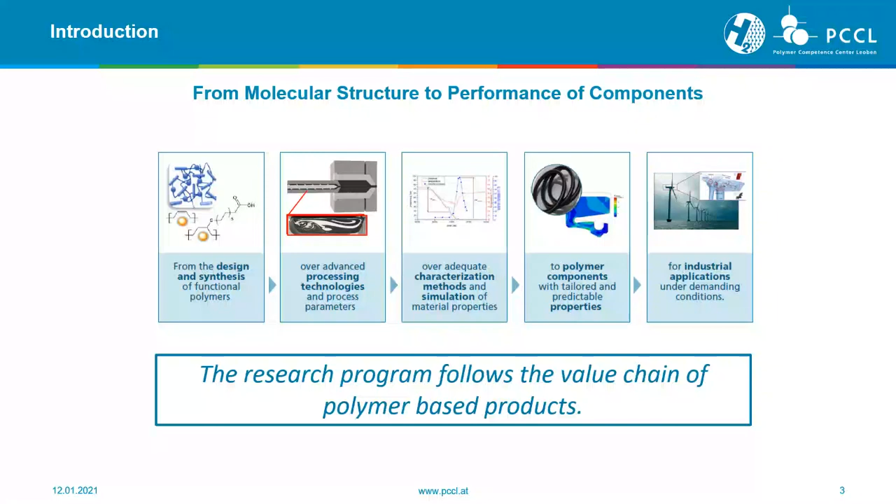More or less, what we offer you is long-term R&D projects with industry partners and also with additional scientific partners. We give you the possibility to access easily public funding schemes, for example, the COMET program in Austria. But we're also working on a contractual basis, giving you the possibility of material characterization analysis or simulation, what we have in-house in terms of service.

To give you an overview, as Gernot mentioned, we have different divisions at the PCCL focusing on different topics. First, as I've shown you for the value chain, we'll start with chemistry of functional polymers. Then we have smart materials, surface testing, polymers, composites for structural applications, simulation and modeling, and the division I'm heading, elastomer technologies and process optimization.

Today, I'd like to give you a little bit more detail about this division. So overall, we are 3 research groups in the division.

We have polymer tribology, headed by Dr. Hausberger. We have processing technologies, headed by Dr. Kerschbaumer. And I'm also heading, additionally to the division, the research group material science and testing. Here on the side, you see a short overview.

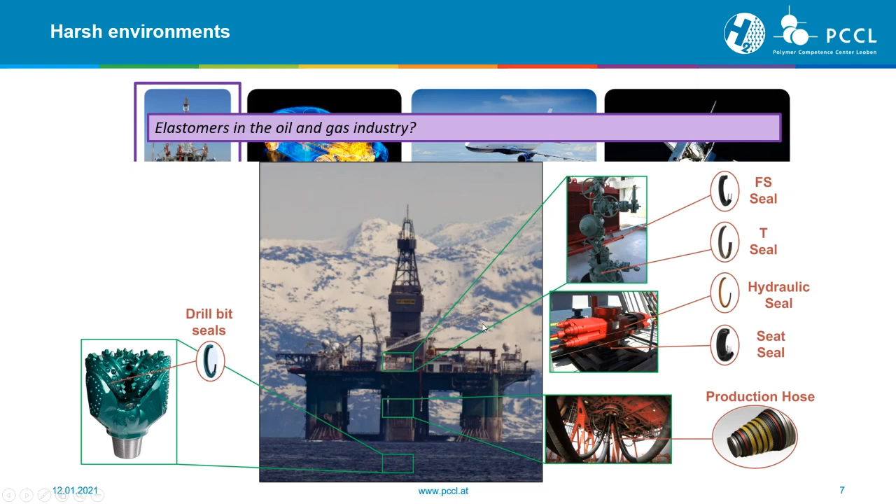More or less, here we have these different applications, and what brings them together is that we have a variety of influencing factors on the material. When thinking of applications at very low temperature, for example Arctic climate, we have temperatures down to -40. When thinking of very high temperatures, drilling depths up to 10 kilometers, or high temperature reservoirs, we have temperatures up to 200 degrees, and pressures up to 1000 bar in combination with very aggressive media.

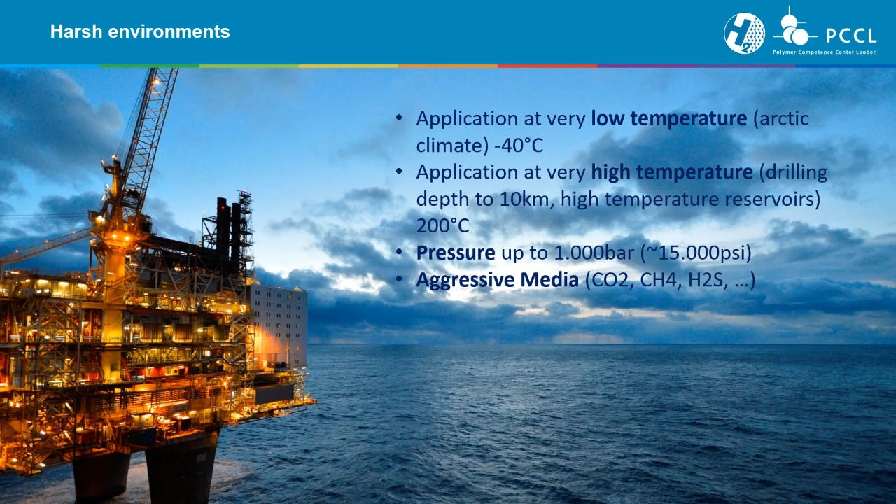All of this leads to an impact on material performance, on long-term performance. So for our material and application we will receive aging, and we will receive swelling when we apply oil and gases. What we are doing here at the PCCL, together with our company partners in different research projects, is trying to get insight into what's happening with the material in the application.

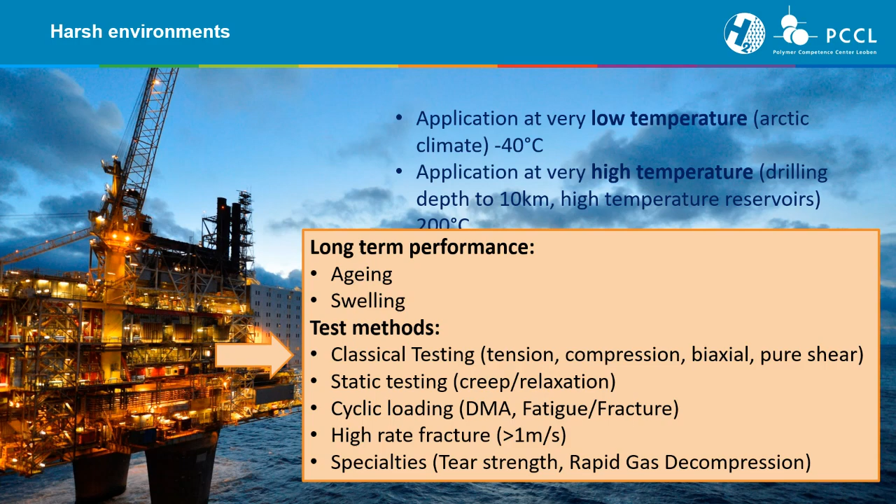Therefore we are utilizing different classical testing devices and classical testing characterization techniques. We're doing creep relaxation, dynamic mechanical analysis, fatigue fracture, applying high-rate fracture tests, and also ending up with some specialties like the rapid gas decompression behavior, which I'd like to tell you a little bit about at the end of the presentation. But let's start with the classical material characterization.

The classical material characterization, as we all know, in the field of polymer material characterization includes tension, compression tests, creep, relaxation, and dynamic mechanical characterization. We can characterize multi-axial loading. We can characterize multi-axial contacts with different tribological systems, and the interaction between adhesion, deformation, and different materials and multi-layer buildups.

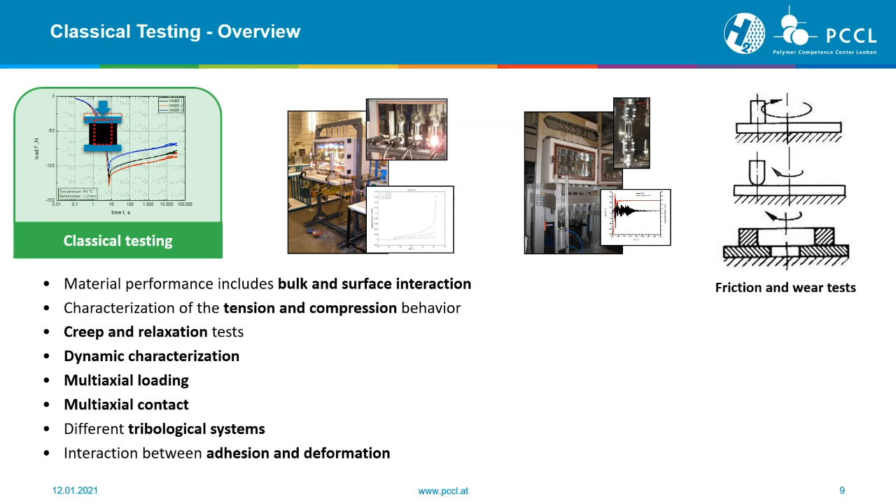When we think of elastomers in this field of application, a very simple example is compression tension. Here you see the compression and tension curve of an HNBR, showing strong nonlinear behavior and the difference between the compression and tension behavior of the material. We've also applied these tests at different temperatures, 70 to 110, both for compression and tension, and the impact of this test temperature on the results is not really that big.

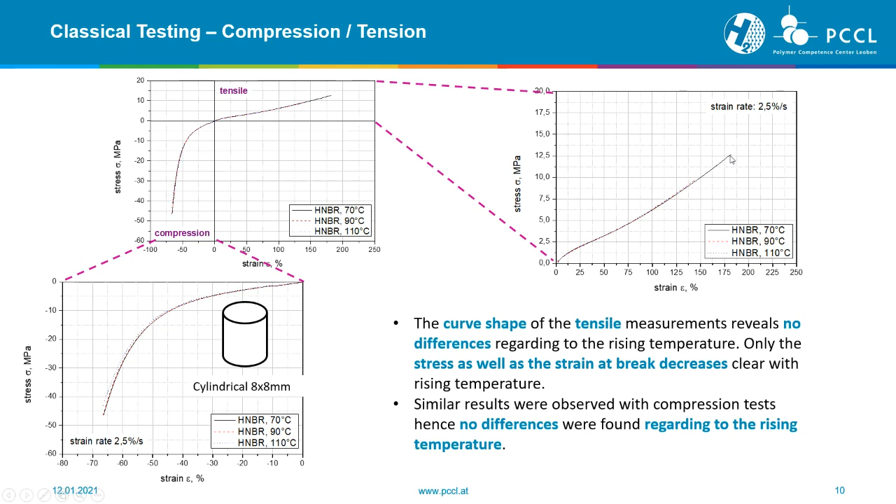The only difference we can see is that we have a little bit of a decrease in the stress and strain at break when we increase the temperature.

Additionally, when thinking of tensile testing of rubbers, we always have some fillers inside the material. With this study, we wanted to analyze a little more the impact of processing imperfections and also the impact of different filler sizes. So we introduced to the material different sizes of glass beads - small glass beads, large glass beads - and used them in both an untreated and treated way.

Based on specimen geometry, an S2 specimen per DIN 53504, we've seen that from the pure HNBR to the large beads we get nearly the same material behavior. But when you introduce the small beads, we found a clear decrease of the stress and strain at break. We used a material filled with 0.5 weight percent, meaning we had many more small beads compared to larger beads, which also explains this behavior. Finally, comparing untreated and treated material, we found that the untreated small glass beads resulted in lower stress and strain at break.

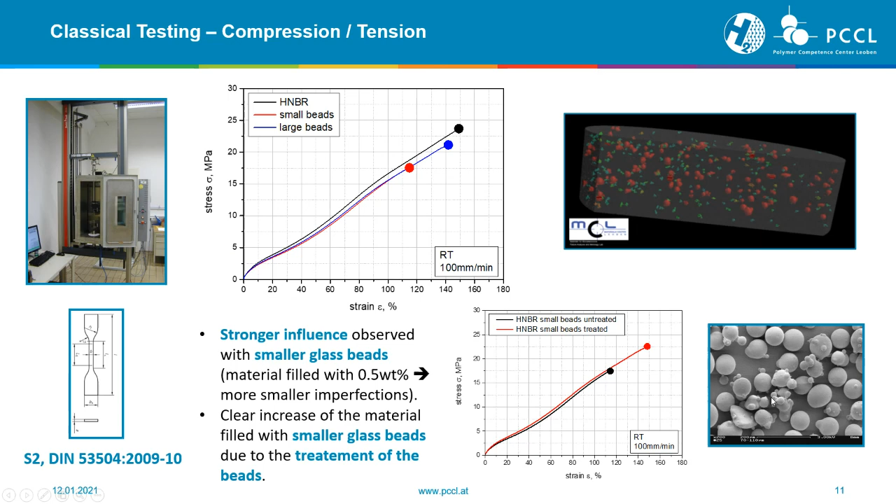When we now think of classical tensile testing, more and more smart materials are coming up for different applications. This is already applied for composite materials to achieve load coupling, for example for wind turbine blades, or to have aeroelastic tailored applications. We've also tried to implement this for soft materials, replacing the resin with silicone, and tried to introduce a load coupling mechanism directly in soft materials to combine both - for example, distinctive tension-twist coupling.

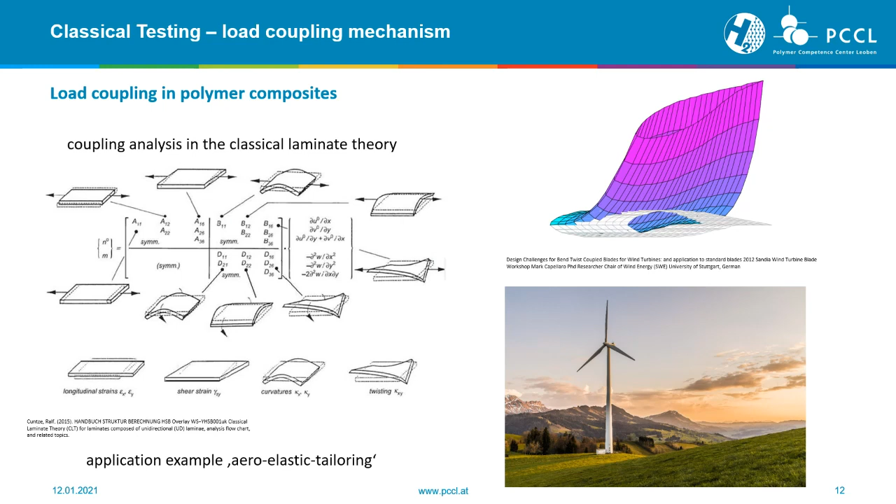And therefore, we developed also different test setups. Here's an example: we developed the test chain starting from single fiber tests, where we used single fibers for characterization, working together with some scientific partners. Then we developed here in Leoben a test setup for fiber bundle testing. And finally, we implemented a test setup where we directly ended up with the possibility to test a woven fabric.

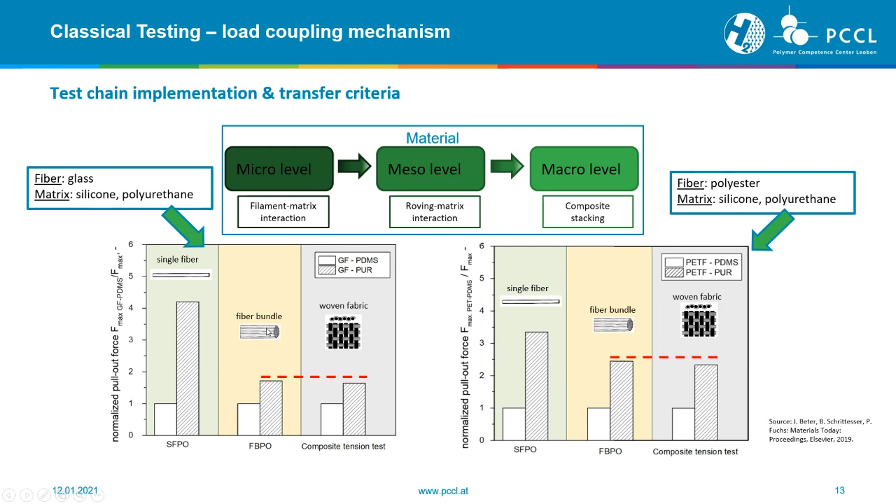For different materials, the left side for silicone polyurethane with glass fiber, and on the right side for the matrix material, silicone polyurethane with polyester fiber, we see the normalized pull-out force. We received for the fiber bundle test, the woven fabric test, and the single fiber test at least the same tendency, the same trend, which means we can characterize much more easily with the fiber bundle, and it's a little bit more application oriented compared to the single fiber test.

However, focusing on the woven fabric, we implemented tests first with setups where we only have one and two layered systems, characterizing different fiber orientations. For example, here you see the fiber orientation 0-90 degrees, where we received a very stiff material performance compared to ±45 degrees, where we have a much higher strain or a much larger strain compared to the lower stress when we compare it to the 0-90 degrees.

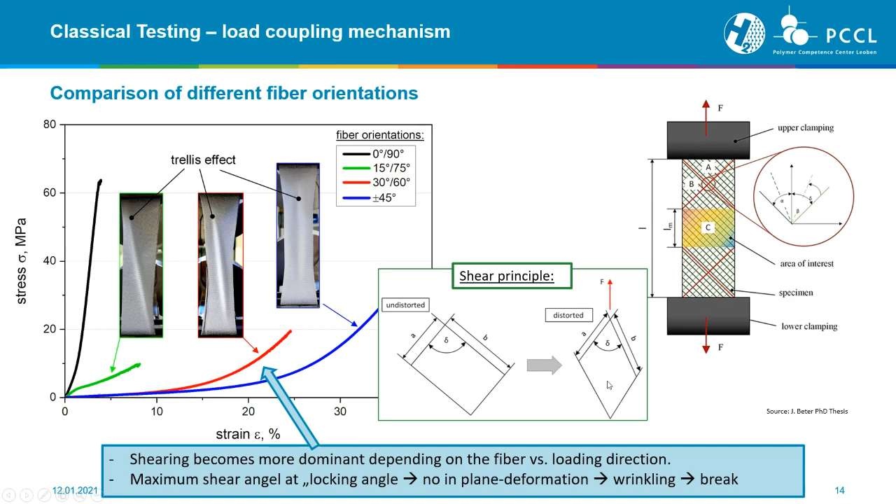And what we found here was also so-called wrinkling of the material. You see it here also with this trellis effect. This is based on the shear principle, because when you reach this maximum shear angle, then no in-plane deformation is possible anymore. And therefore you end up with this wrinkling, and finally with the break of the setup or of the material.

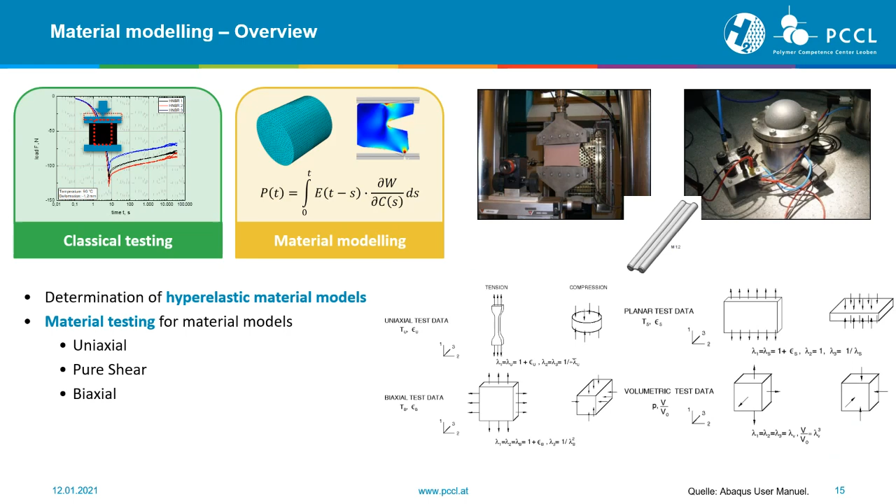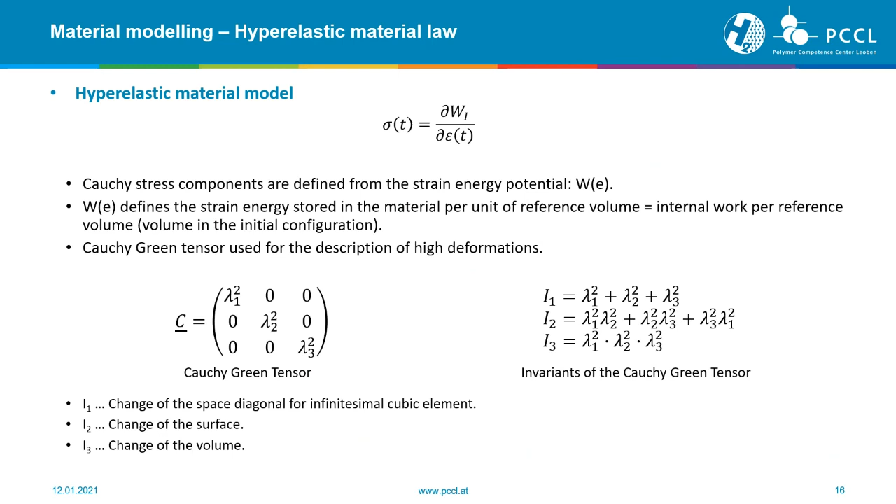When we think of elastomers, then we think of hyperelastic material models, also very simple at the beginning. Here we have to define strain energy density. This is a specialty of elastomers and soft materials: the hyperelastic material performance is based on an energy, compared to classical polymers.

This means when we think of different hyperelastic material laws already implemented in some simulation tools, for example Abaqus, you can choose from a Neo-Hookean model, to a Mooney-Rivlin model, to an Ogden model, only to give you an example. However, these are all just basic models which explain a hyperelastic material law. Nevertheless, you always have to think of where are the limits of your application and what you'd like to do with your simulation.

These are two very important points, because, for example, the Neo-Hookean model fits well for uniaxial tension experiments up to a maximum deformation of 40%. This means when we have an application where our material is applied up to 500% deformation, the Neo-Hookean model will not fit very well. Therefore, there are also other models like the Ogden model or the Mooney-Rivlin model. However, as I mentioned, these are really the basic material models.

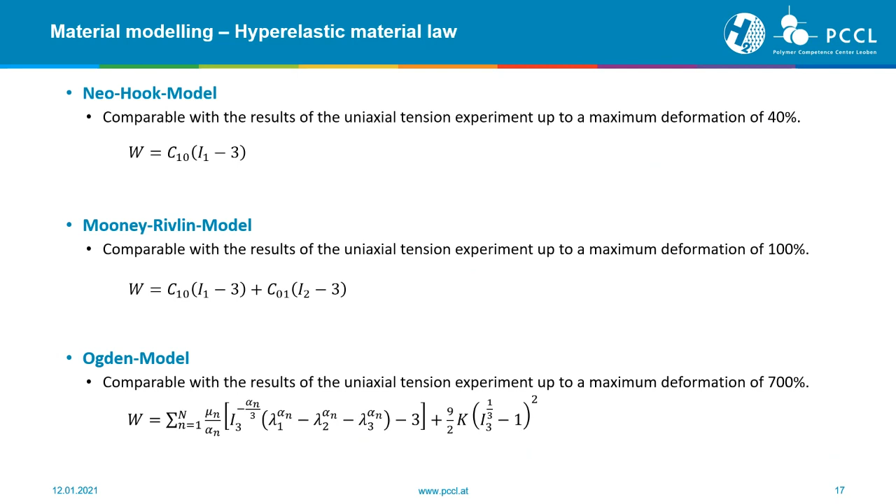And what we're also doing here is developing new material models, especially for composite materials. One aim we are focusing on is, for example, to develop homogenized material models to describe the hyperelastic material behavior. Only to give you an example or a very quick overview, here we have the MFI model.

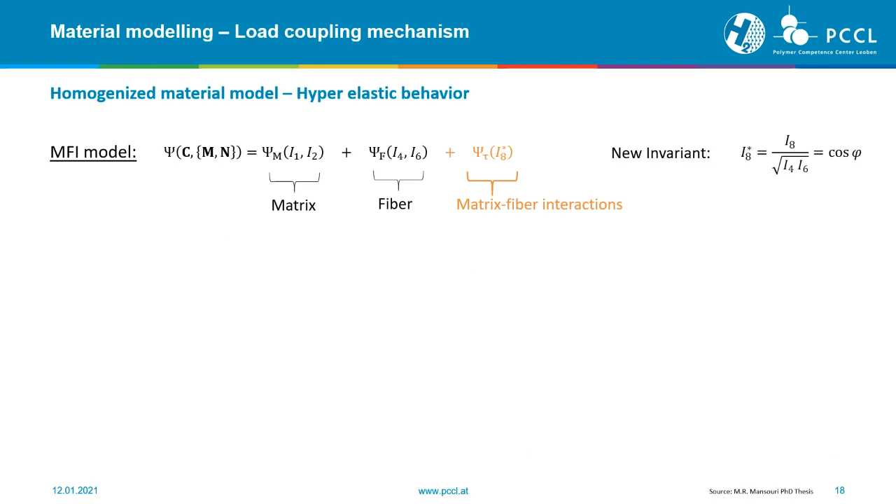This MFI model describes the matrix behavior, describes the fiber behavior, and additionally, when we think of our material showing this wrinkling effect, we also have to explain these matrix-fiber interactions. Here our simulation group has introduced a new matrix-fiber interaction and also a new invariant, explaining this material behavior as you see it here.

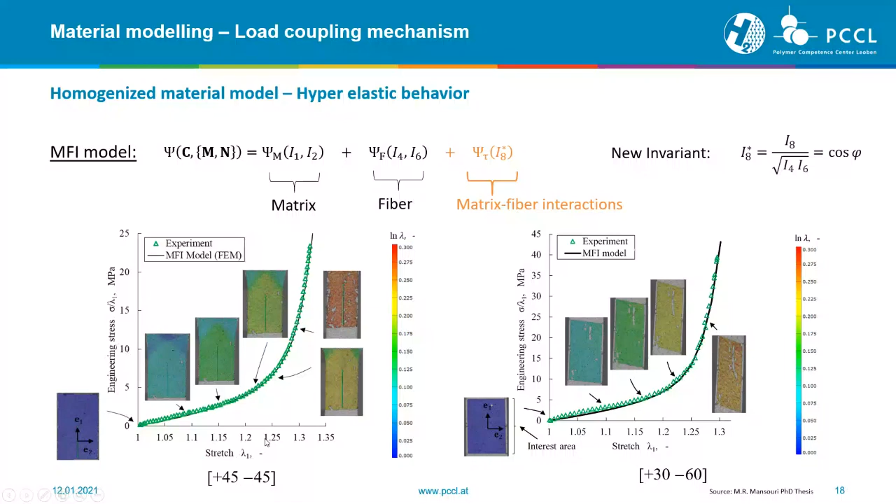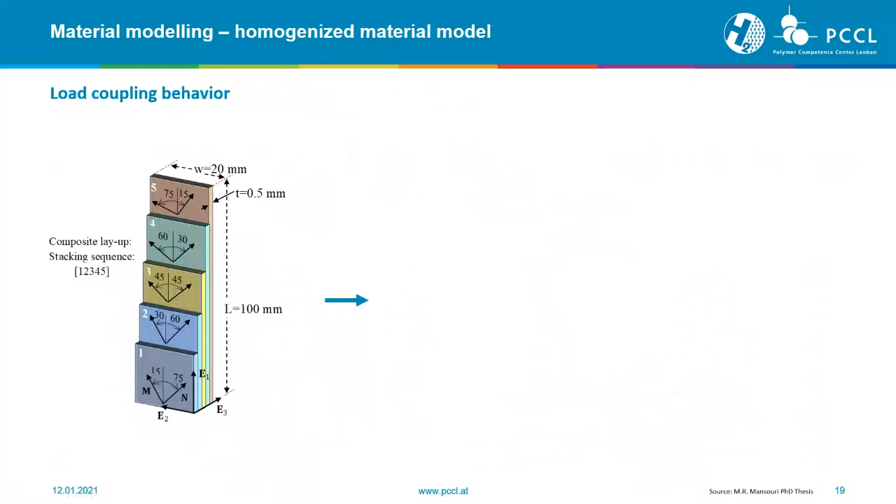From these simple tests or simple material models, we always want to move toward an application. Therefore, we also want to describe the load coupling behavior with a composite layup. Here, we've introduced some simulation tools, adapting this model with the aim to introduce a defined end twist or defined end moment when we apply a defined force to the material.

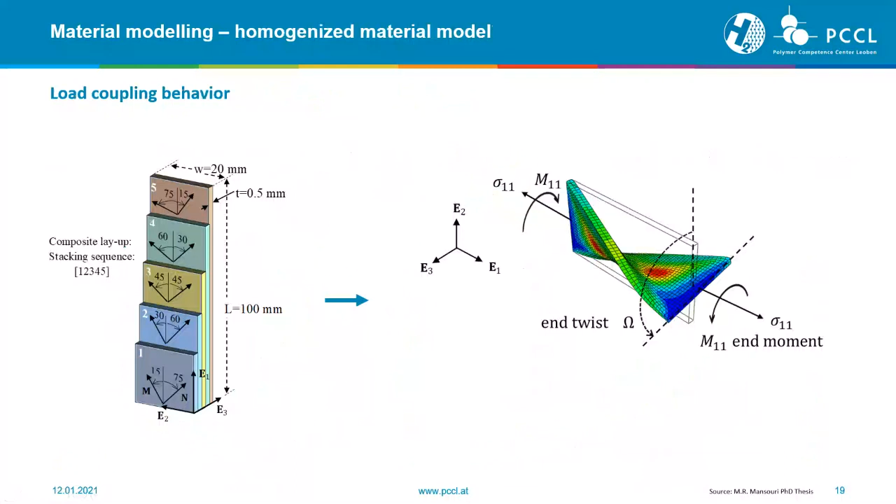This results in a lot of data points when we think of moment as a function of end twist, where we can see where we can achieve the highest or biggest load coupling potential, based on our material model and the theoretical observations we've made so far.

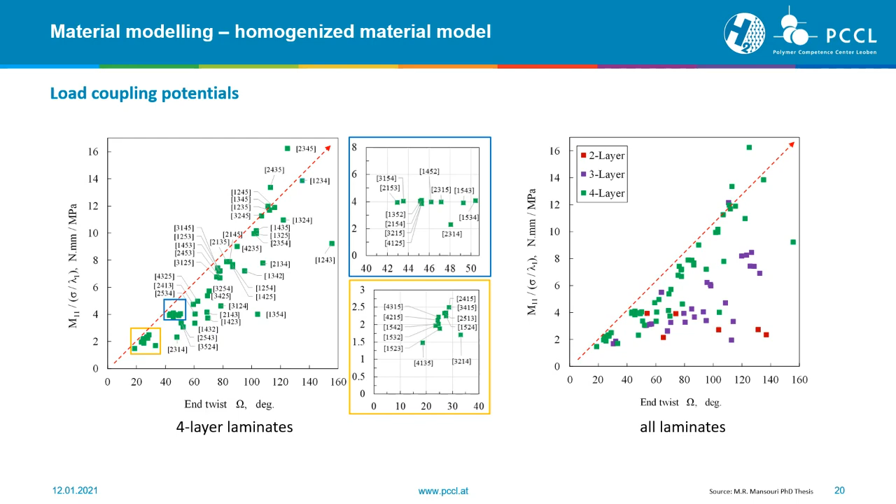We are still on a theoretical path, and to bring this to reality, we also have to measure this end twist and the moment we can receive with our different layers. Therefore, we've designed a concept to measure these load coupling forces and moments by introducing a new load coupling test setup, directly recording the twist angle, the torsion force, and the tension force.

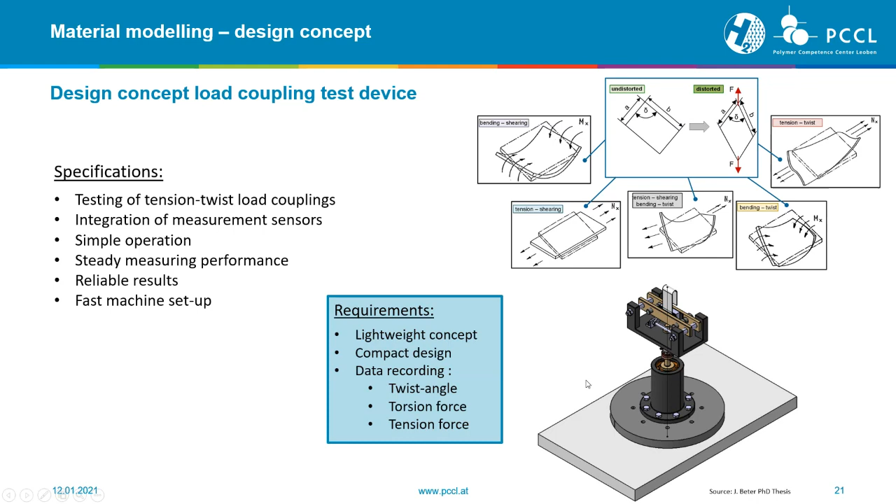Here we are with the first results of this test setup. On the left side, you see stress-strain properties. On the right side, you see the twist angle. What you can see very clearly is that we've monitored the stress depending on strain for plus-minus 45, 30-60, and 30-60 plus-minus 45.

All of these are two-layer buildups: 2 layers of plus-minus 45, 2 layers of 30-60, and here 1 layer of 30-60 with 1 layer of plus-minus 45. You see here clearly the different material behavior.

Additionally, we've implemented a study with different clamping distances or gauge lengths. You also see here that for the twist angle with plus-minus 45, we received nearly nothing, whereas for 30-60, we received a twist angle of up to 25 degrees.

The colored pictures you also see here are not simulation results—they are directly measured. It's the measurement of surface strain with a camera system. We are currently in the phase of directly correlating these simulation results with our test results to verify this test setup.

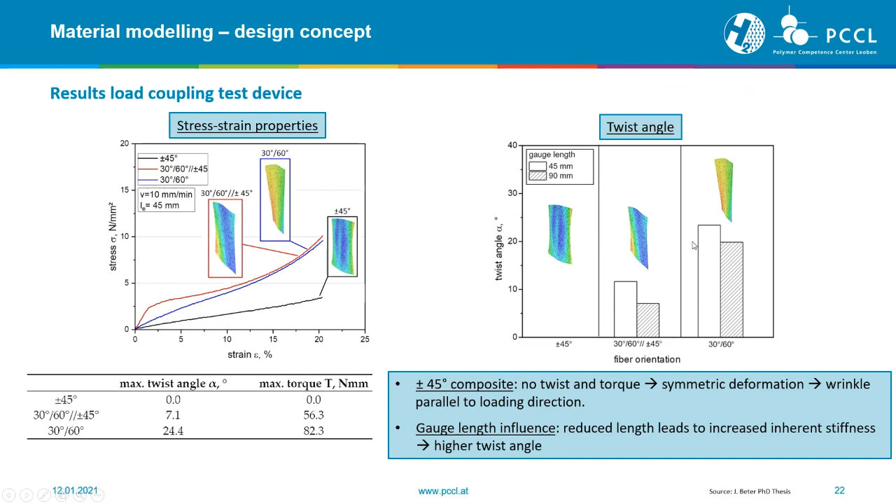Now, leaving the material models, we're moving in the direction of aging of the material. When we think back to different applications—oil and gas, space, some industry applications—we always have some media, some temperature, some harsh environments, which directly reduce or impact the lifetime of our materials.

Here we are talking about thermo-oxidative aging when applied to higher temperatures. When we have oil or swelling agents, the material will swell. And when we have both media and temperature, we have a combination of both effects, leading to a higher impact of thermo-oxidative aging or swelling.

As an example, you see here an impact on the loss factor. Based on the dynamic characterization, we've defined storage modulus, loss modulus, dynamic modulus, and loss factor. The loss factor, tangent delta, also represents the damping of the material behavior. We've studied the material performance here.

In this case, once again for HNBR: black line is virgin, and then you see red, blue, and green lines for aged material—at 100 degrees for 24 hours, 72 hours, and 168 hours. Then we've increased the temperature from 100 to 150 to 170.

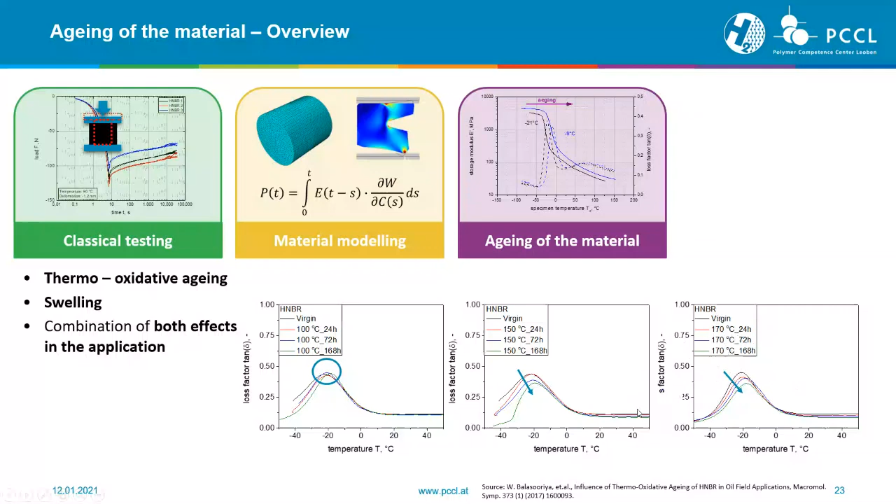But we see this not only in our dynamic mechanical characterization, which represents the network or damping capabilities of the material—we also see it, for example, in stress-strain curves.

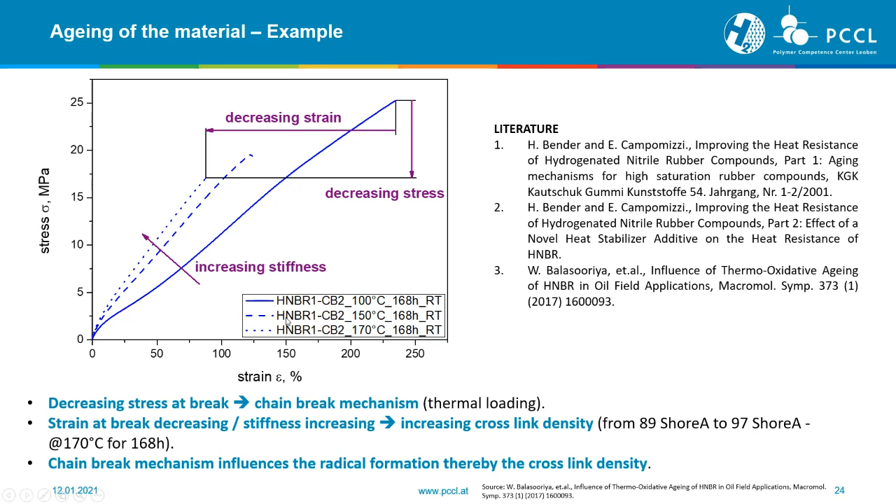I'm showing you just 3 examples here, with maximum aging time always the same at 168 hours, applied at 100, 150, and 170 degrees C. What we've seen is the virgin curve ending with a strong increase in stiffness, a clear decreasing strain, and a strong decreasing stress—this just with 168 hours for an HNBR, which is usually applied for high temperature applications.

Leaving the aging of the material, we will come to material fracture and fatigue. When we're focusing on material fracture and fatigue testing, we can think of a lot of different applications where these play an important role.

When we have different frequencies, for example, think of hoses in different machines when we start them, we have frequencies up to kilohertz going through the material, which sometimes leads to failure of the component. We also have a strong influence of different temperature.

When we stay with machines and hoses, we also have most times some heated oil inside these hoses or some hydraulic fluid, which leads to an impact of temperature, and for sure an impact of the loading amplitude.

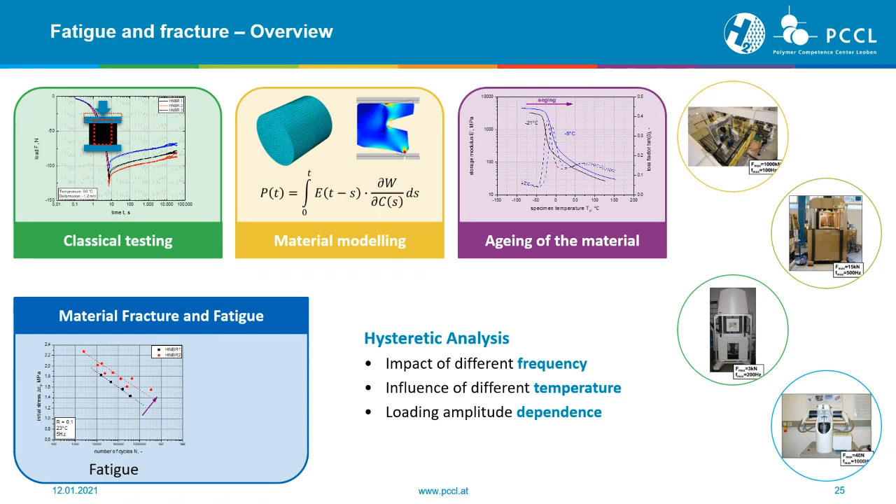I'd like to give you a short overview and explain a little bit more about fatigue. What is fatigue? Basically, fatigue describes the weakening of the material caused by repeatedly applied loads, so-called cyclic loading. This means applying a cyclic load to our material.

Here we can distinguish between two approaches. We have the crack nucleation approach, which is more or less based on dumbbell specimens, and a Wöhler approach. This means I define a stress amplitude, apply it to my sample specimen, and end up with a number of cycles to failure.

The second approach is the crack growth approach, more or less the fracture mechanics approach, based on tearing energy, explained by a Paris-Erdogan approach or Paris-Erdogan plot, using, for example, pure shear specimens.

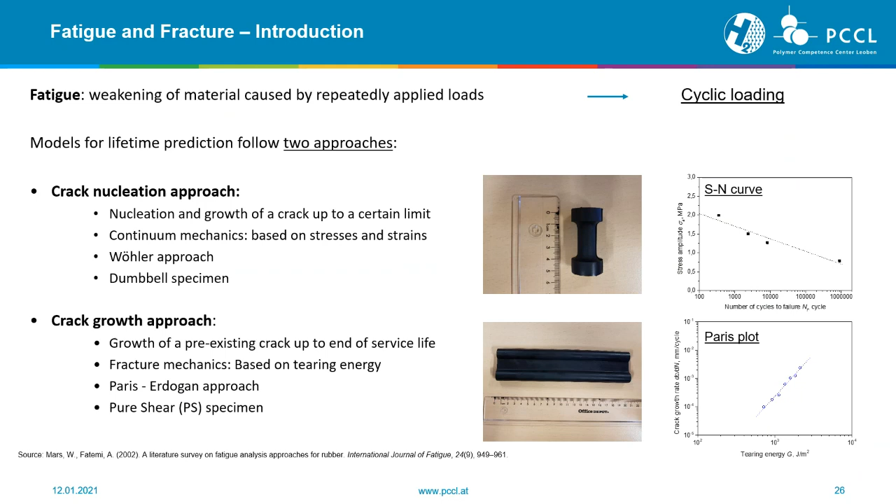For today, I'd like to focus a little bit more on the crack growth approach, and give you an insight into what we've done here so far and what we have developed.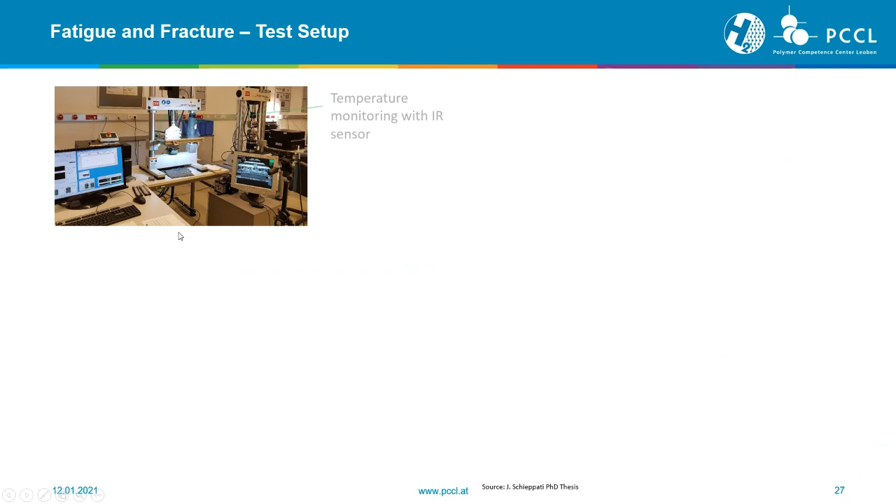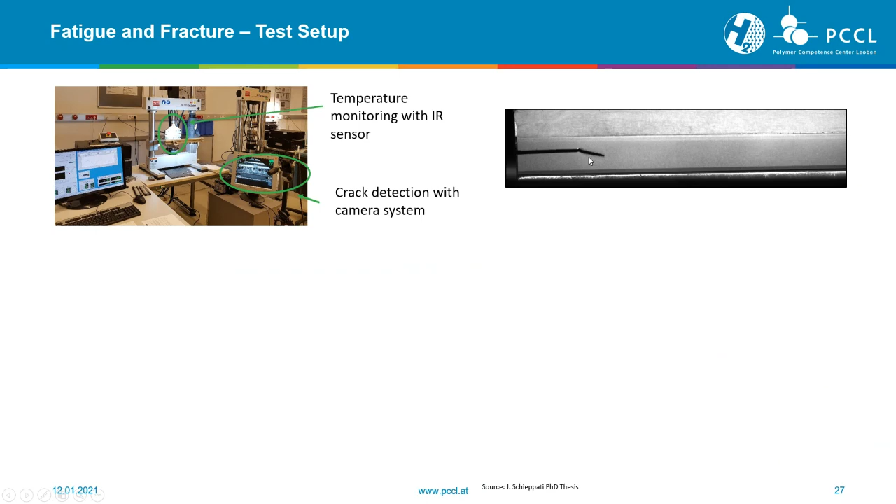You see here our test setup in the lab, where we have our specimen with IR sensor, a crack detection system, so a camera, to monitor our crack growth over the number of cycles to failure, or the number of cycles to load.

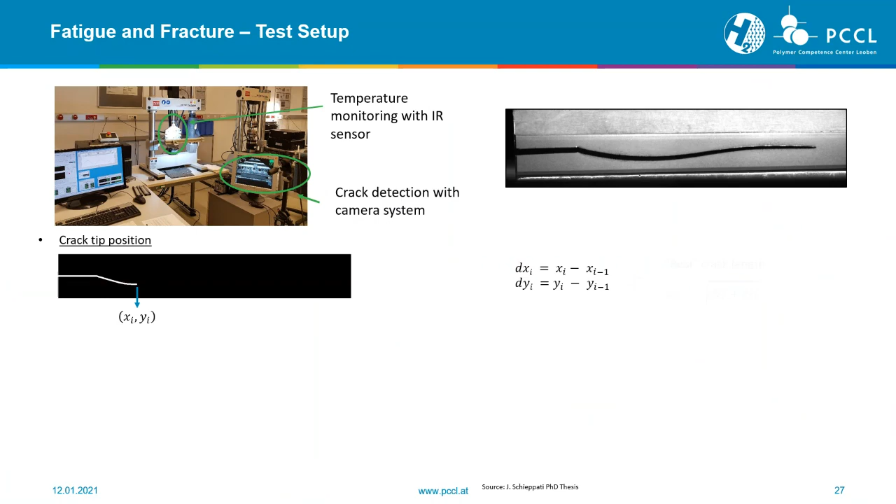We developed a method where we can measure directly with this camera the crack tip position, X and Y, and then end up with the contour length to finally calculate fracture mechanic parameters.

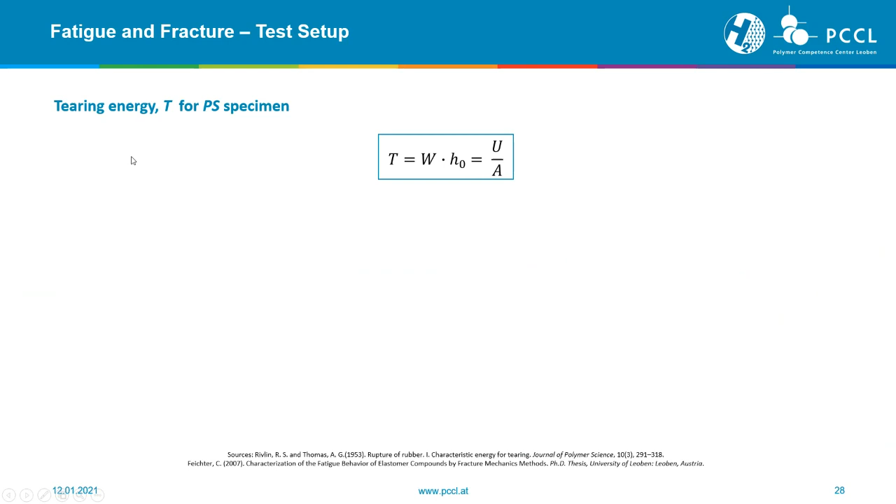These fracture mechanic parameters, in this case, we've chosen the tearing energy for pure shear specimens. The important thing for us is, on one hand, the hysteresis, which means the area under the load-displacement curve, and on the other hand, the uncracked specimen area.

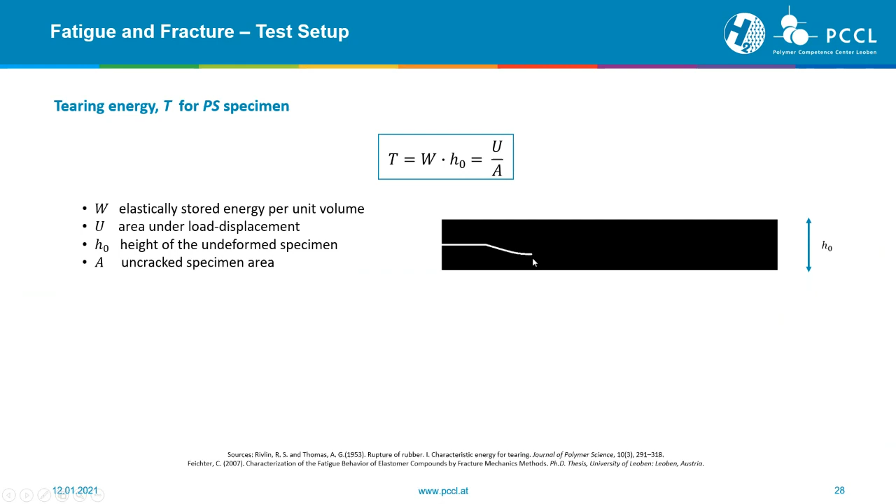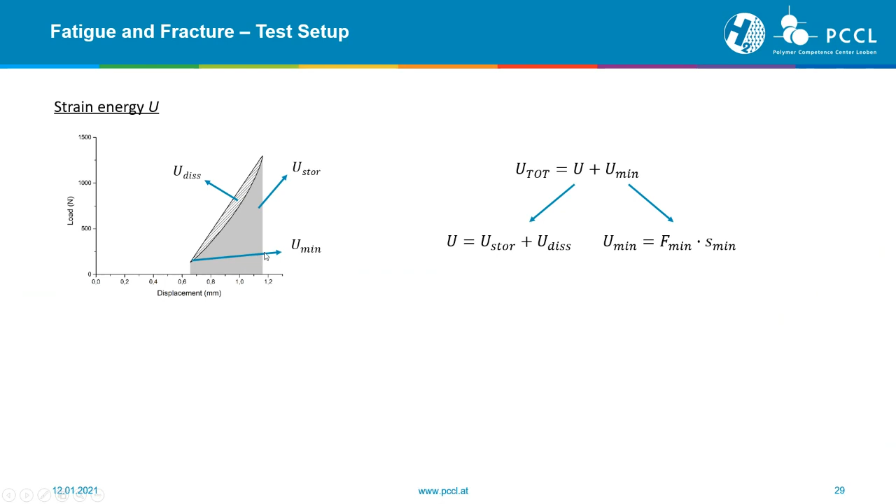Therefore, we need the position of the crack, with some boundaries, ending up with the definition of the strain energy, as I mentioned. So we have the total energy, with dissipated stored energy. We defined in our case a minimum energy, and then end up with this uncracked specimen area, as I mentioned before.

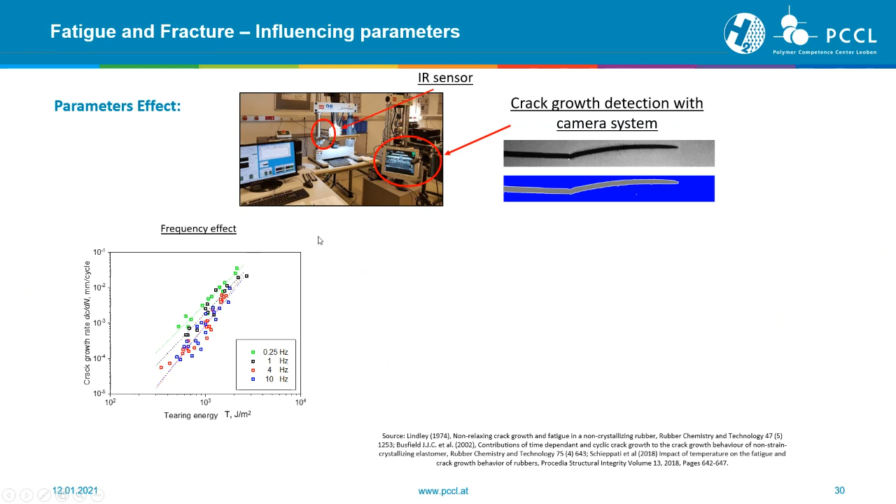This brings us to the results, and here we also have a lot of different influencing factors, as I mentioned before. The first case, the parameter effect, we've measured with this camera system for different frequencies. We implemented these tests for 0.25, 1, 4, and 10 Hertz.

As you can see in our results, for higher frequencies we received a lower crack growth rate. At first thought this seems a little bit weird or strange, but we searched the literature and thought a little more into detail about this.

At the end, it makes sense, because the total crack growth rate consists of a static part and a dynamic part. When we increase the frequency, the static part decreases and the dynamic part increases, and due to this decrease of the static part, the total crack growth rate is a little bit lower compared to the lower frequencies.

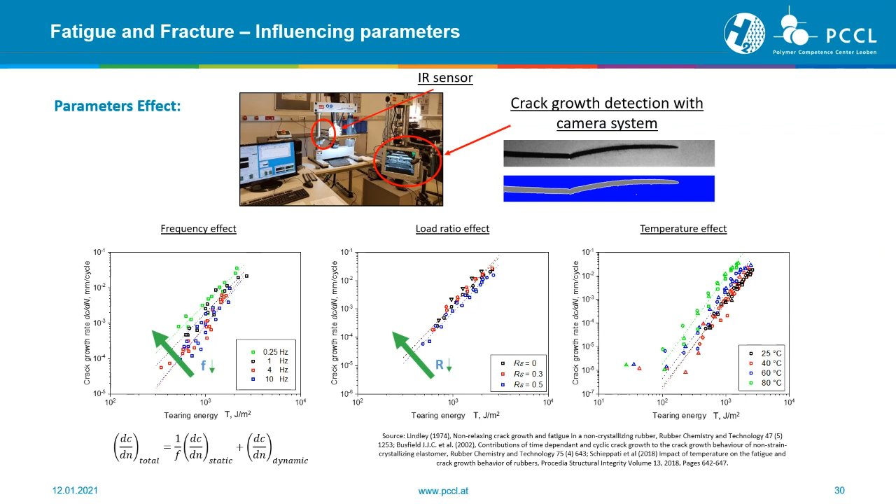Staying with temperature, we looked a bit more into detail because when we talk about application time in terms of fatigue and hysteretic performance, temperature always plays an important role. Therefore, we applied an IR camera, and what you can see here is the surface temperature as a function of the number of cycles for the different frequencies I showed before: 0.25, 1, 4, and 10 Hertz. You see for the lowest frequency roughly 22 to 24, but here we go from roughly 24 up to nearly 30 at 10 Hertz.

This is only for a pure shear specimen, which has a thickness much lower compared to the dumbbell specimen. The dumbbell specimen has a diameter of roughly 12 millimeters, while here we have a thickness of 4 or 6 millimeters, which makes a big difference.

Additionally, not only the specimen geometry has a big impact, but also the material performance. For material A, for example, we have a nearly linear behavior when talking about elastomers, whereas material B shows strong non-linear behavior with high deformations, ending up at much higher temperatures.

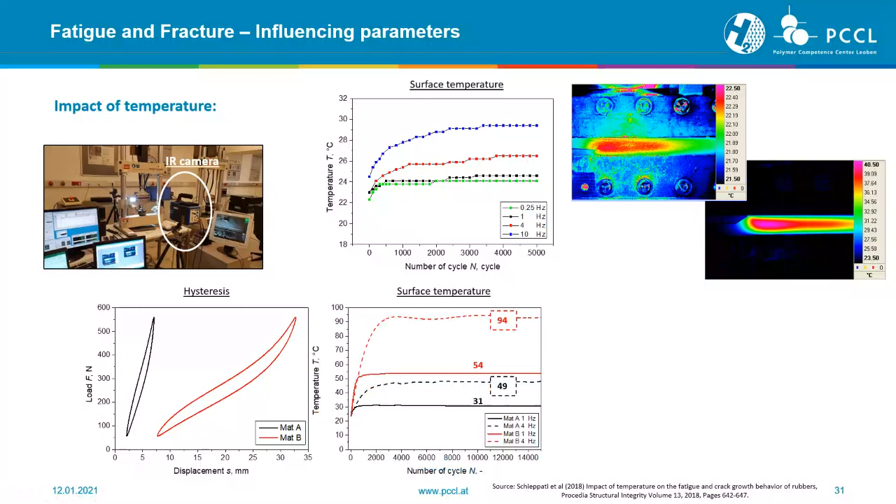Additionally, we measured the internal temperature of such dumbbell specimens by directly molding a thermocouple inside the material, doing this several times to get an average of what's happening. As expected, the core temperature is even higher compared to the surface temperature we measured outside the material.

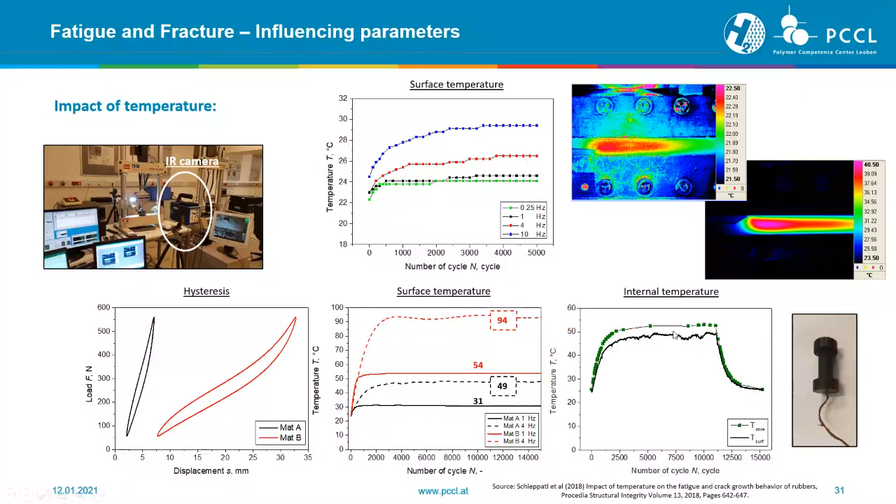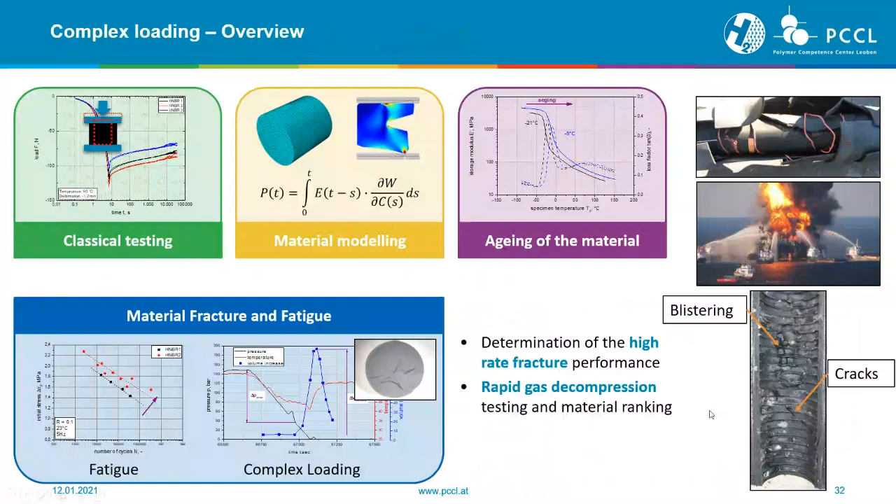This brings us to the next point: complex loading behaviors, where we're back to oil and gas industry with very complex loadings and harsh environments, as shown in the introduction. For example, this hose failed at 1,300 bars, and nobody wants a burning oil rig onshore or offshore. Here we cut a hose open where you can directly see blistering and cracks inside the material.

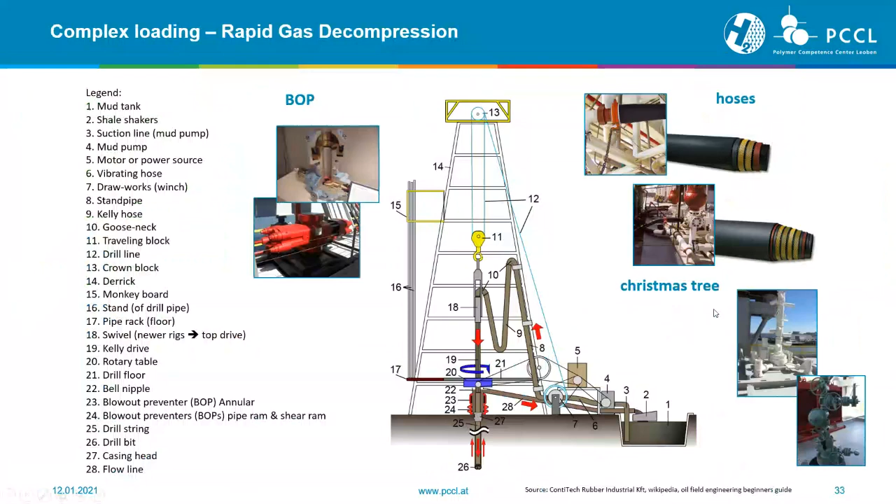To describe this very complex loading, we'd like to give an overview of these applications again: safety applications like blowout preventers, different hoses, Christmas trees. What we've focused on so far is rapid gas decompression behavior, a very special behavior especially for materials applied to high pressure gases. This is very important for oil and gas industry nowadays, but there's also a second important application we'll focus on in the last slides.

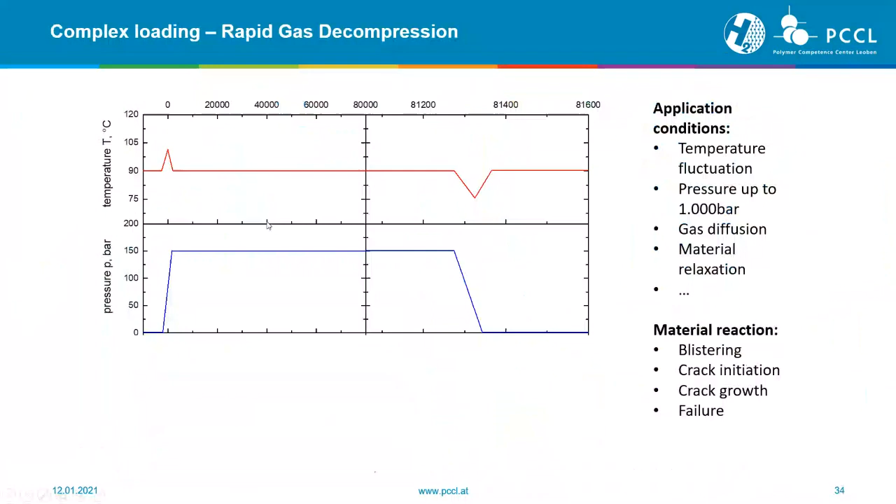At the beginning we have a compression phase, applying temperature and pressure, in this case up to 150 bars. This causes swelling of the material due to gas penetration. Then we disturb this equilibrium state and the decompression phase starts, with temperature fluctuations at the beginning and end. During decompression, the stored gas inside the material leads to an even higher volume change, and finally to cracking of the material—blistering, crack initiation, crack growth, and then final failure.

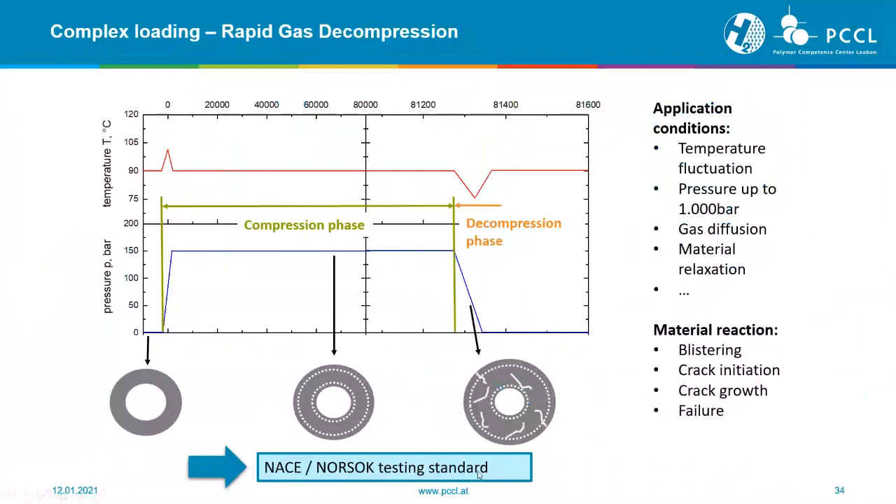One or two testing standards are NACE and NORSOK. They specify temperatures, pressures, specimen geometries, and gases for the gas industry, in this case CO2 and CH4. You store your O-rings directly in the autoclave, test according to the standard, and then rate the cross-section after testing by cutting the O-rings into 4 pieces. Using a microscope or camera, you photograph the cross-section and count how many cracks there are and how long they are. The rating goes from 0 to 5, where 0 means no cracks (very good) and 5 means complete separation of the seal into fragments (completely failed).

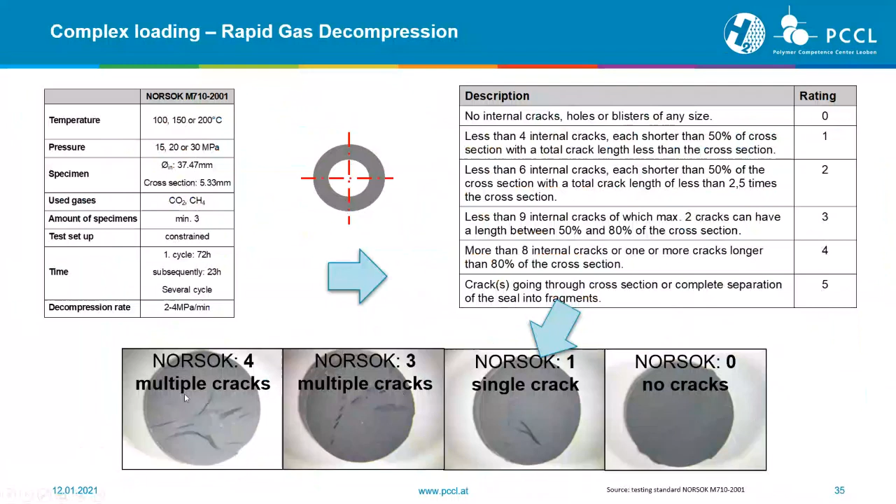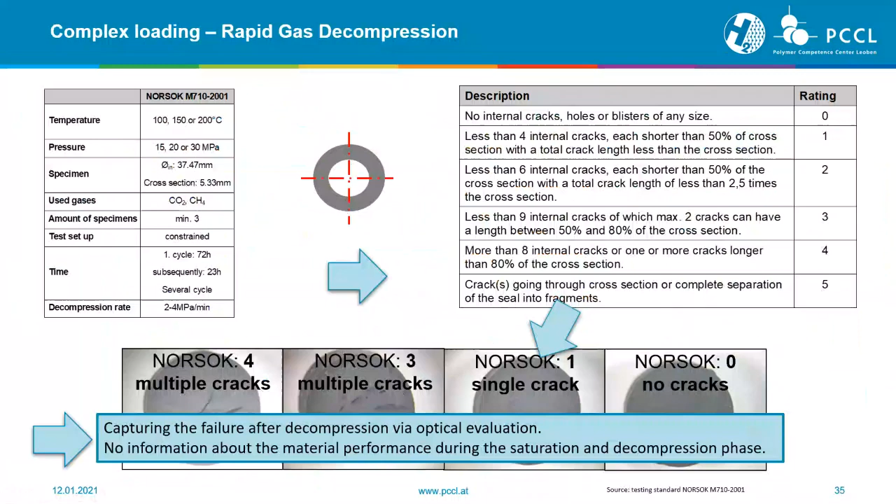What we have done so far is that based on the testing standard, we can just observe the material behavior after the test in terms of fracture. We'd like to go a little bit more into detail. Therefore, we developed together with a company partner a test setup, an autoclave test system with a camera system, where we can directly measure the volume change during the compression phase as well as during the decompression phase.

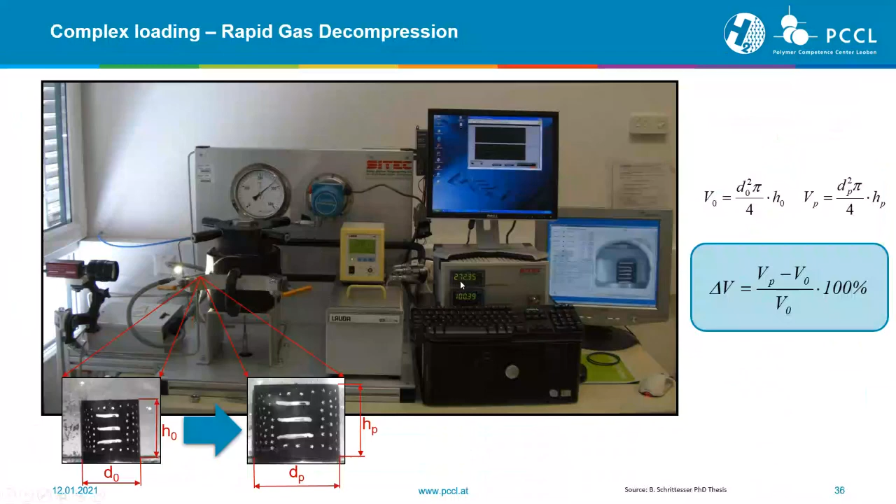You can see the autoclave temperature unit, the pressure, in this case 272 bars. What we've measured are the compression phase, the decompression phase, and additionally to the pressure and temperature, what we directly monitor over our equipment. We can use also the volume increase during compression phase, the volume increase during decompression phase, and then we can also define some additional parameters, for example an initial time, which is needed until the volume increase starts.

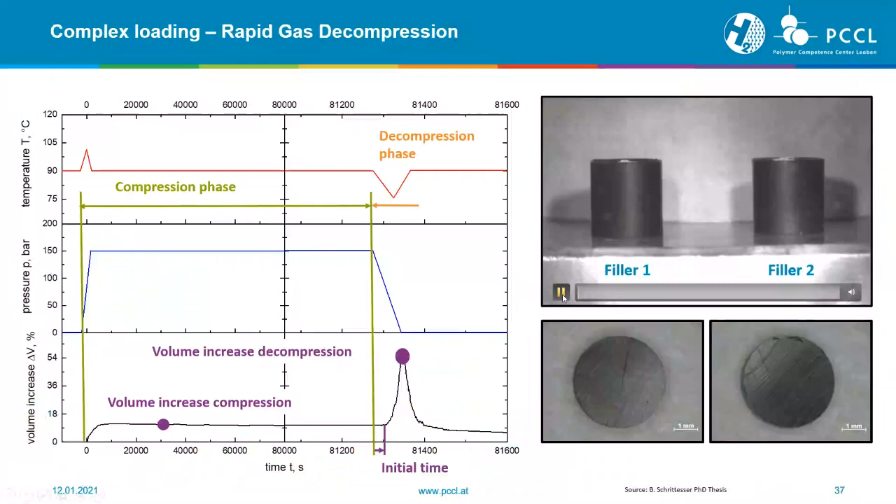Here I've brought with me a sample of 2 different fillers. Basically, more or less, the material is the same, just used filler 1 and filler 2. What we can see here now, the decompression phase starts, clear volume increase for both, but for one sample, the material cannot withstand this crack initiation process, leading to a rapid crack growth inside the material, and therefore you have like a rocket effect where the gas which is stored inside the material is spontaneously released by a crack. The second material performed very well, with a ranking of 0.

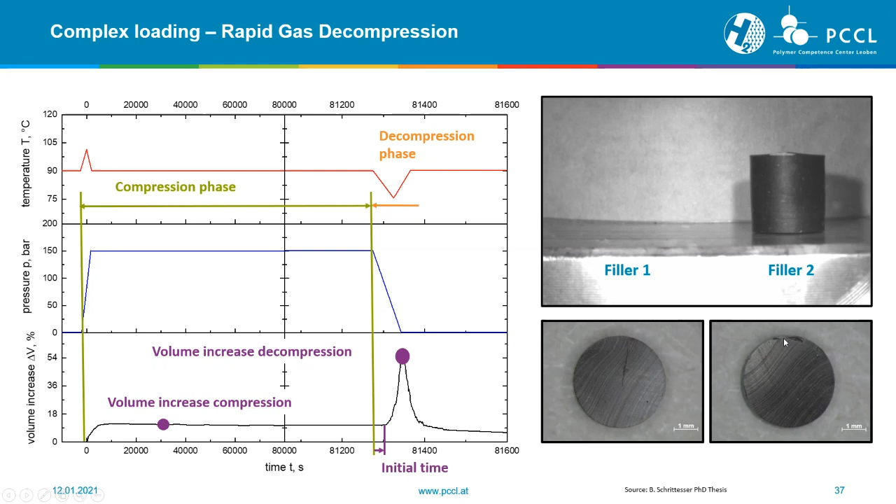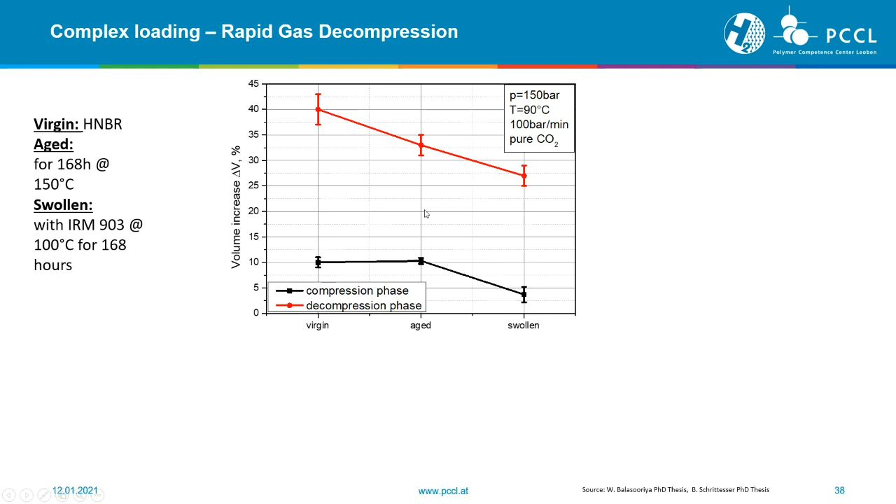These results look a little bit weird at first, but when you think a bit closer about what's happening in the material, for example for the swollen material, we've observed a lower volume increase. This is more or less clear because we already have liquid inside the material. This means there is not a big capability of storing gas inside the material because our material is already swollen.

When you think of our aged material, from 40 to 32% volume increase, it's also clear because when you think back on the impact of thermo-oxidative aging, we've found a stiffness increase, a decrease of stress, a decrease of strain at break. This increase in stiffness leads to a lower volume increase because the material fails earlier, breaks faster, and therefore cannot expand like a virgin one. And even more so the volume change of the swollen one, for the same reason - we have less gas inside due to the fact that we already have some oil inside our material.

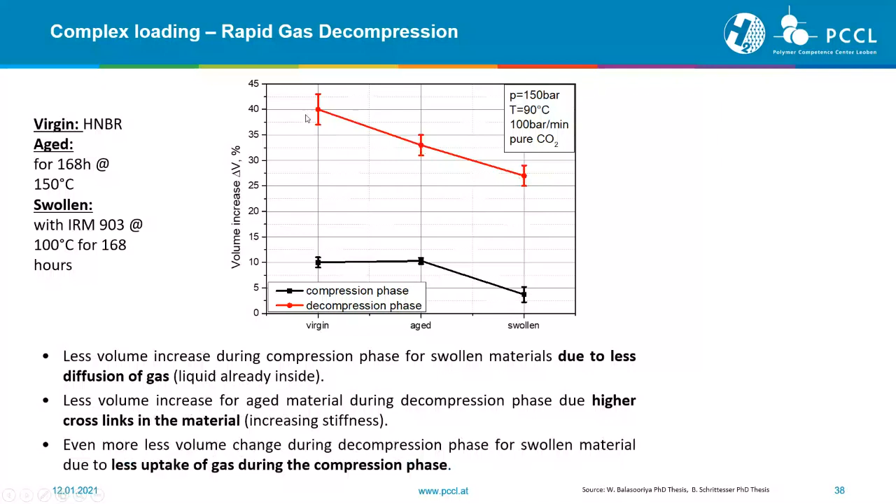However, so far so clear, explained, and looks good. So based on this explanation, it should be that the virgin one showed the best material performance. But when we think of what the material finally performed, the virgin one showed the worst performance, and the best performance was shown by the aged one. This is again due to this increased stiffness.

This should show you that the material behavior is not that easy to correlate, and we should always consider different influencing factors. In this case, the aged material performance was the best one because of these higher crosslinks, because of the stiffer material performance. However, when we increase the pressure from 150 bars in this experiment up to 200, 300, 400 bars, it would be different and the ranking would also change.

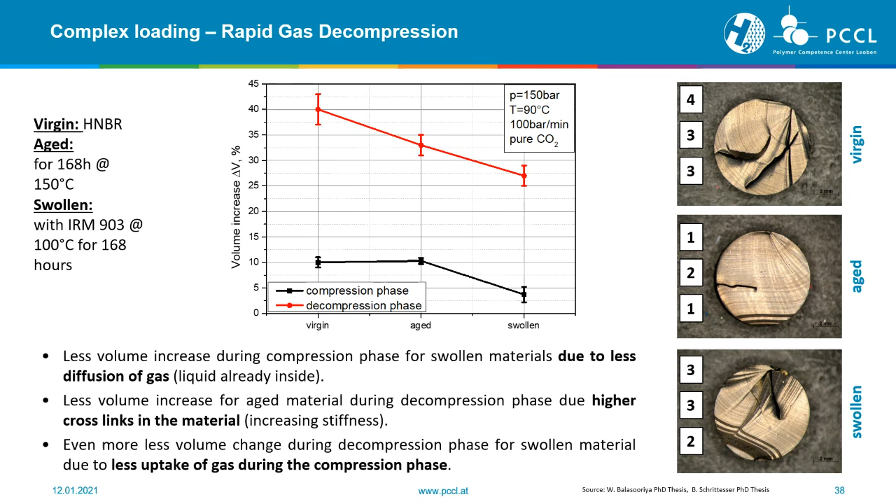And as I told you before, this high gas application is not only for the oil and gas industry. When we think of future energies and also of the field of application of hydrogen, we have the same situation for hydrogen gas, which means we have gas storage up to 1000 bar with a temperature of -40 to +85. In the fuel cell vehicle, we have gas storage up to 700 bars, -40 to 85.

We have a fuel cell stack. We have different materials all over this hydrogen production, fuel station, fuel cell vehicle, and fuel cell stack, which means we have, for example, polyethylene, polyamide, rubbers, different high performance materials like PEEK, and all these different materials are exposed to these extreme operating conditions and are more or less influenced by these gases and temperatures.

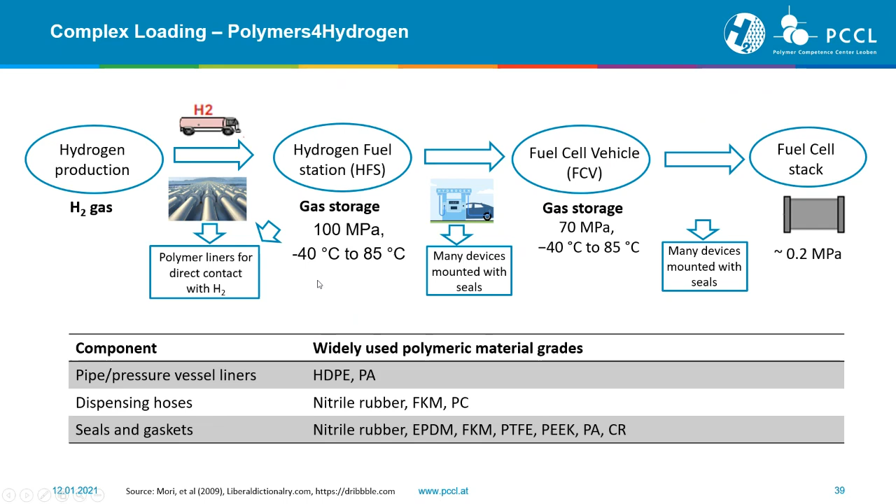Also, just to give you an insight, as I mentioned at the introduction, I'm also leading the project called Polymers for Hydrogen. We're focusing exactly on that field. This project has 3 smaller projects included, with project 1 dealing with storage of high pressure gas.

We're working in the field of design and development of novel multi-layer buildups and the scientific basis for type 4 and type 5 high pressure storage tanks.

Also very important is the characterization of permeation and the buildup of a robust permeation test setup, which will be focused on the transport of high pressure gas.

Then in the third project, which deals with more complex material behavior, we look at rapid gas decompression and tailoring filler matrix interface to withstand these extreme operating conditions, environments and fluctuations.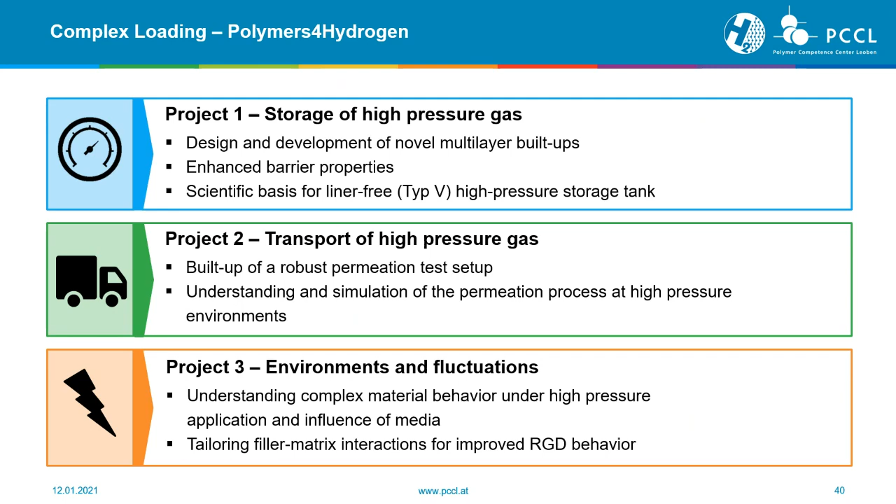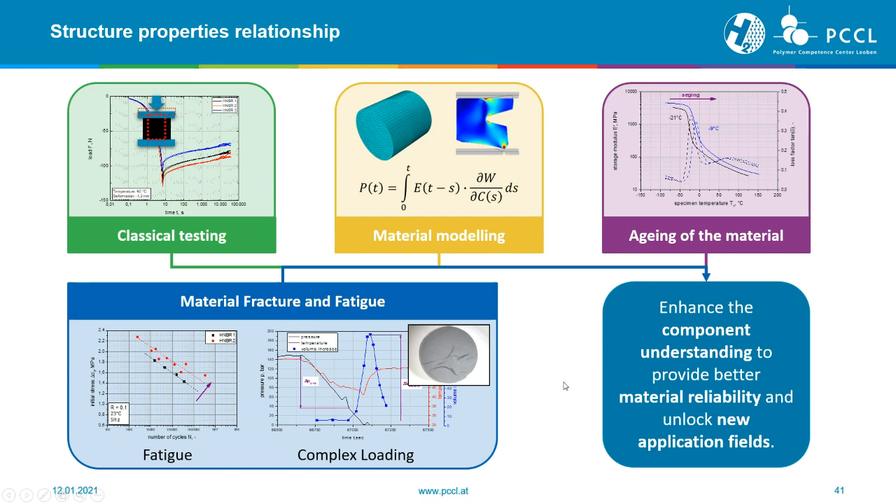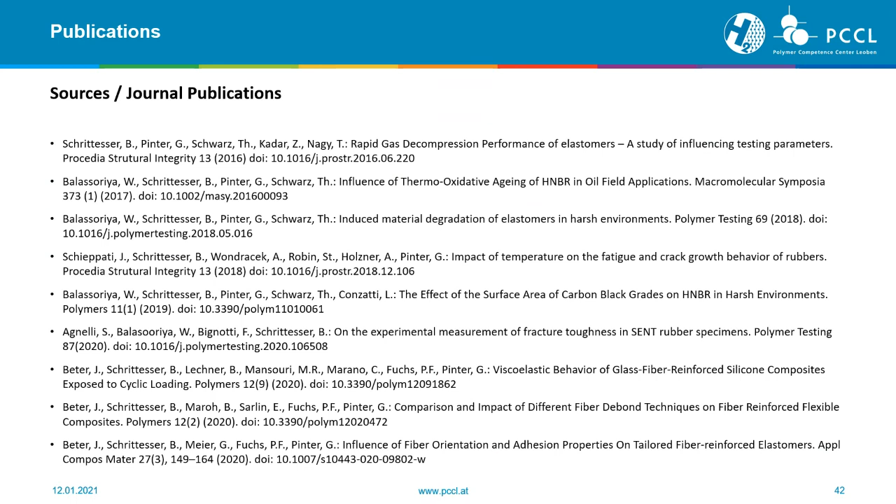I've also brought with me the scientific basis of the presentation, our latest publications from our research groups. Finally, I'd like to thank all scientific partners, all company partners, and also the PCCL for financing this research. Thank you very much for your attention.